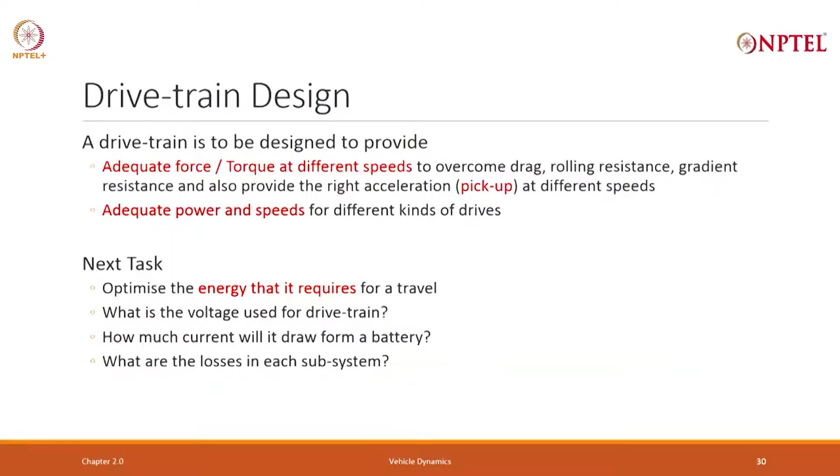So, we will start looking at it. As we go on, we will look at more and more all these four things. In the next section, I am going to start with the energy that it requires to travel. Some assignment problems for a 2-wheeler, e-rickshaw and sedan.

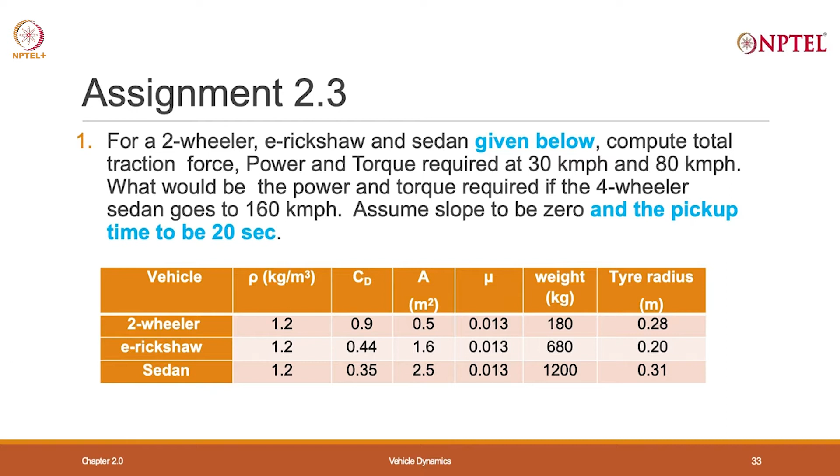We have shown how to compute traction power and torque at different velocities. Given a certain wheel radius, what would be the power and torque required? We are basically asking you to learn to compute and get some feel for the numbers. Assume that a sedan is stuck on a climb at 12 degrees.

When it is stuck, it has to start, and during a start it will require a torque, plus I will have to give a minimum acceleration for it to get moving. I have taken a very small acceleration, 0.5 meter per second square. So, now what do I have to do?

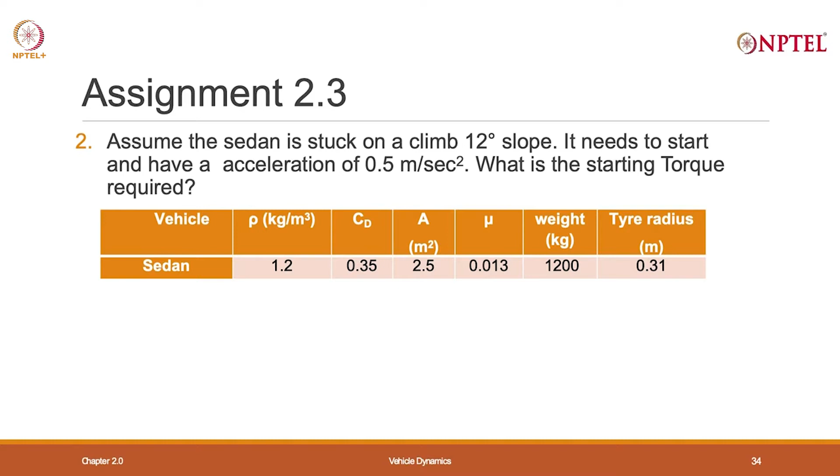For that vehicle at 0 speed I have to worry about the torque, then I have to worry about the acceleration and torque due to acceleration, plus there is a drag force. Of course, it is a very low velocity, so it will be nearly 0. There will be some rolling resistance, I have to worry about the force due to that and therefore the torque due to that. So, I have to combine all this torque and say what is the starting torque required.

Before I start this new chapter, there were two questions that were asked to me, and let me try to answer. The first question was: when a vehicle is starting, is mu going to change? Is there something called static friction versus dynamic friction? Mu is related to friction.

Now, there are two ways of dealing with it. You can either have a different value of mu during movement and mu during starting. That is one way of dealing with it. Very often that is not what is done. In the vehicle computation, what you assume is that mu is the same, but you require a certain extra, minimal acceleration.

So, compute the torque required due to acceleration plus the torque required due to the drag and mu, and that is the static case. In fact, in this problem I talked about, I have done starting, and I said there is a very large slope of 12 degrees, but I also said include a certain acceleration. It is at 0 speed, but include acceleration.

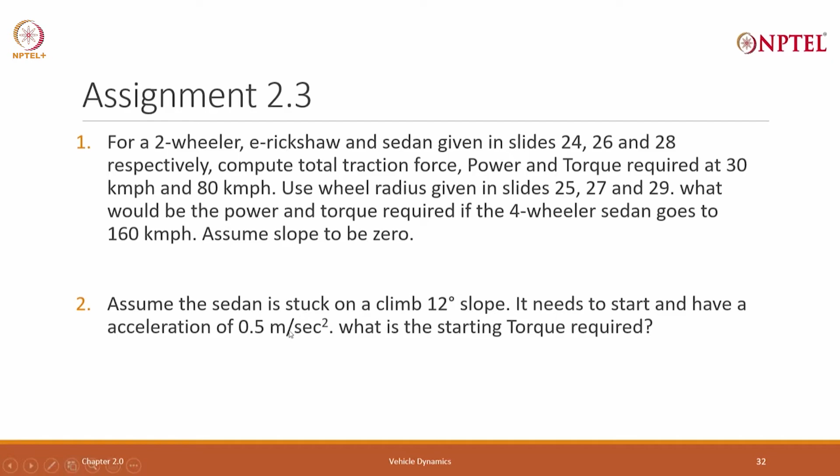So, take the acceleration of 0.5 meter per second square, you can convert that into kilometers or any other units. Now, compute the torque due to this plus the torque due to slope, that is basically the starting torque. The other way would be to say mu has changed, but in electric vehicles or even IC engine vehicles, normally mu is assumed to be constant.

Of course, there is a small function of velocity. At high velocity it matters a lot. Starting torque is the same as moving torque plus the acceleration required. Without acceleration, you can't move. When you are at 0 speed, you have to get to some kilometers per hour, that is the starting acceleration.

Starting acceleration is another term used for the change in value of mu. So, that is question number 1, and when you do this problem, you will get an idea. We will give you more assignment problems like this. There was a second question that was asked, by Akhila?

Yeah, suppose you have a long slope. In many hills, the slope is constant and it will continue for 2 kilometers. What will happen to the energy requirement, the power requirement, the torque requirement? We will actually deal with that to some extent in this chapter on the concept of drive cycle. But let me point out, it is related to motor design and battery design.

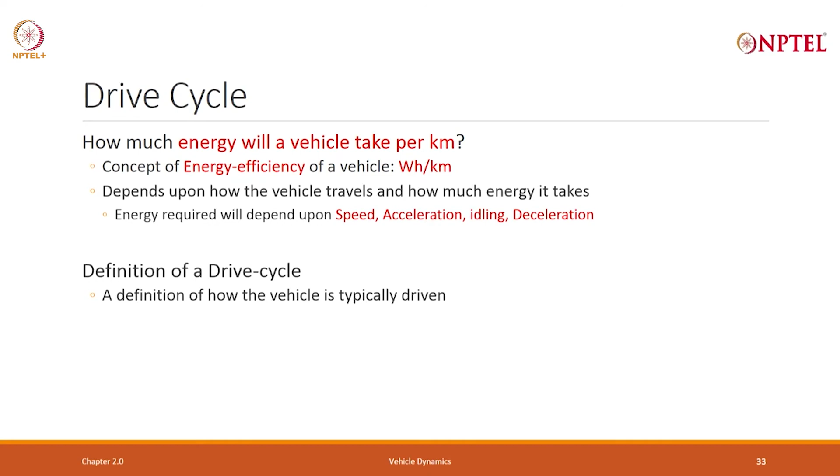You can talk about watt hour per kilometer by defining what is called a drive cycle. This, by the way, is done for a petrol engine, and is also going to be done for electric vehicles. It is a standard drive cycle. A drive cycle is a definition of how the vehicle is driven. It tries to standardize the driving pattern. Vehicles are tested as per a standard drive cycle.

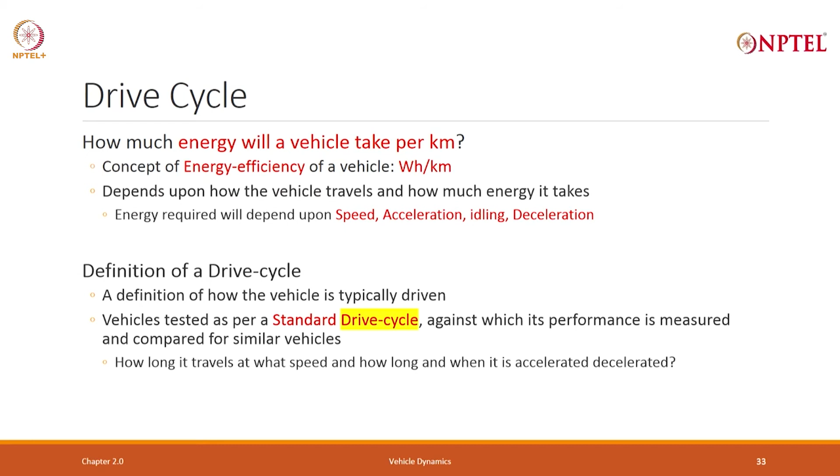The standard drive cycle will tell you how long did you travel, at what speed you traveled for how long, how much did you accelerate, how much did you decelerate, did you wait, idle. It will define this, and for a class of vehicle, it will standardize it, and that is called a standard drive cycle. A standard drive cycle for a two-wheeler, a standard drive cycle for a three-wheeler, a standard drive cycle for a four-wheeler. What is the purpose of this? Well, a drive cycle will help you compare. If you have made a vehicle and he has made a similar two-wheeler, I can compare what is the energy efficiency of yours vis-a-vis that of his.

So, I will take an example, a sedan which is driven at a constant speed of 50 kilometer per hour, and let us assume this is the vehicle. This is the sedan, it is on slide number 29 here, not 28, because I probably added a slide here. Area is 2.5 square meter, drag coefficient is 0.35, weight is 1200 kg, and suppose it is driven at a constant speed of 50 kilometer per hour for 5 minutes. Compute the distance traveled and energy used.

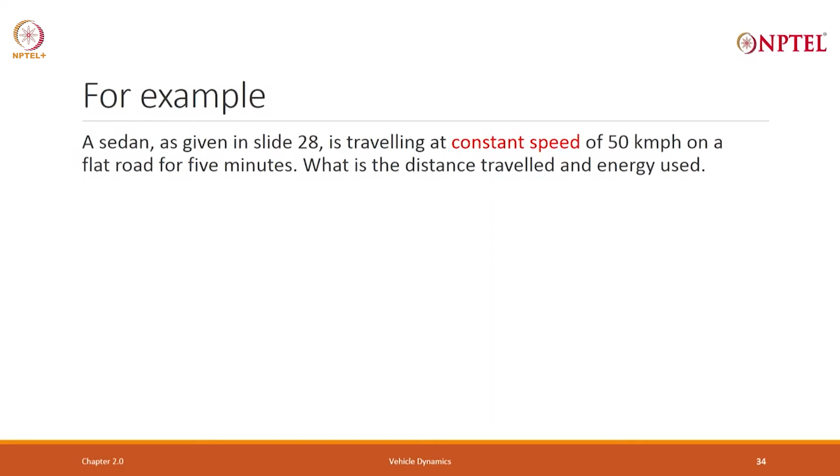So, if I compute the distance traveled and energy used, the drag is what? At 50 kilometer per hour, drag comes to 150 newtons. Rolling resistance is higher, 190 newtons at 50 kilometer per hour. And if I am driving at a constant speed, and let us assume no slope, only the drag and the rolling resistance have to be taken into account. So, the total force is 340 newtons. Power consumed is therefore 340 newtons multiplied by the velocity. Velocity is 50 kilometer per hour; I have to convert it into meters per second by dividing by 3.6, and I am consuming 4.72 kilowatt to overcome this. For 5 minutes I am consuming 4.72 kilowatt.

What is the energy that I am consuming? 4.72 kilowatt for 300 seconds. 5 minutes is 300 seconds, but why do I divide by 3600? Converting into hours, because I want to write it not in terms of watt second, but watt hour, and if I do this calculation I get 393 watt hour. So, for 5 minutes I am consuming 393 watt hour. If I continue to drive for 60 minutes, I will consume 12 times this.

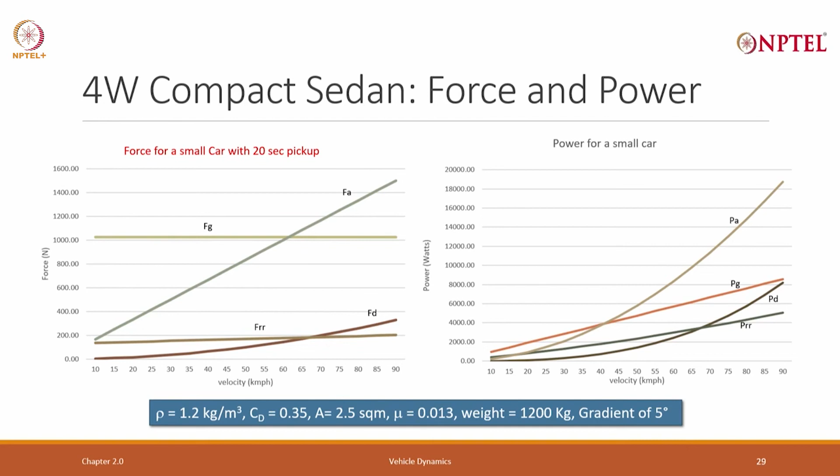And as I compute the energy required, assuming R equal to 1, 100% regeneration, what will be the energy required? Can someone tell me? 393 watt hour. It is exactly the same, 393 watt hour. Why? Whatever energy I spent during climbing up, during accelerating, I am recovering that during deceleration, because R is 1, but in reality R is not 1. Let us take R equal to 0.3.

Now, I have to actually compute the energy required during acceleration. I have to add the acceleration force plus the drag force plus the rolling resistance force, and compute the power required for all these three. I have to add the power, that is the power I will require for accelerating, and in 20 seconds I am going to get there, and I compute the energy, and then I also compute the kilometers traveled. The 4.16 kilometers I assumed earlier was when I was traveling at 50 kilometer per hour, but during acceleration I will also be traveling some distance. So, I compute that and then divide it, and I will get watt hour per kilometer.

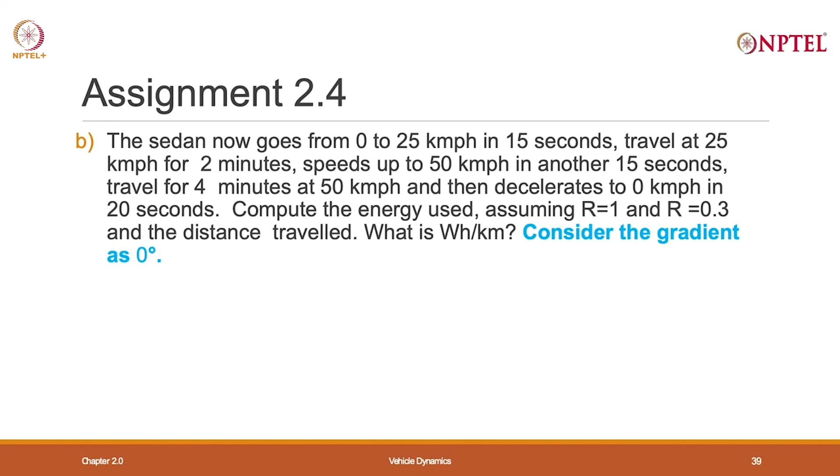I take a second problem, again an assignment problem. This time I am starting from 0 to 25 kilometer per hour in 15 seconds, travel at 25 kilometer per hour for 2 minutes, and then speed from 25 kilometer per hour to 50 kilometer per hour in another 15 seconds, travel for 4 minutes at 50 kilometer per hour, and then decelerate to 0 kilometer per hour in 20 seconds. Compute the energy requirement. The method is the same; also compute the distance travelled and the watt hour per kilometer. These problems are not very difficult, and will get you used to the concept of a drive cycle.

What is pointed out is very correct. We have assumed that only the acceleration force is reversed; the drag and rolling resistance are not reversed. So, ideally you should apply R only for the acceleration force or the gradient force. But acceleration force and gradient force are so much more than the rolling resistance and drag that all that is taken into account in R itself, the regeneration efficiency, and you do not separate them. If it was only for acceleration and deceleration, the regeneration efficiency may have been 0.35; combined it is only 0.3. So, in computation R is assumed for all the energy.

We are assuming that during climbing up and climbing down, net energy consumed is 0. So, not exactly correct with R equal to 1, but if you want, you can do this detailed calculation, but that gets into a little bit of trouble. We just assume that it is the same. For our first course, we will assume it is the same. It is combined, and we will not separate it out. Otherwise, things will get complicated. Okay?